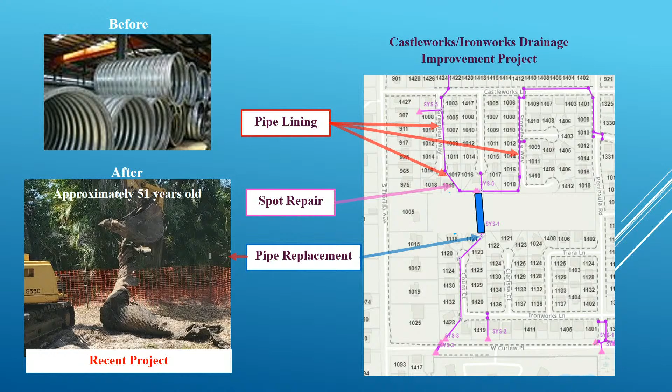I'd like to put in a plug for anyone watching who's envisioning a project in your yard that involves digging: please call 811 and get your utilities located before you dig. Absolutely. I actually have an under drain I have to put in my home this weekend, and I called 811 too. I know there's nothing on that side of my house, but if by odd chance there was something, it's going to cost you a lot of money to be in trouble if you didn't get that located. So what Tommy said was great advice for residents, contractors, everyone.

So the person who did that fence unknowingly hit the pipe - did they have to do anything corrective? Well, we're nice guys. All they did was let us into their backyard, and we fixed it.

And the pipe that you did the spot repair on and then lined - that liner, that's not a structural liner though, right? It is, yes. And that'll take the kind of weight that... Correct. I don't know what the downward force is, but what we did was put another piece of corrugated material on top of it, larger than the hole we made, so any downward force would be absorbed by that. And the structural integrity of the liner is incredible, so we were okay with that.

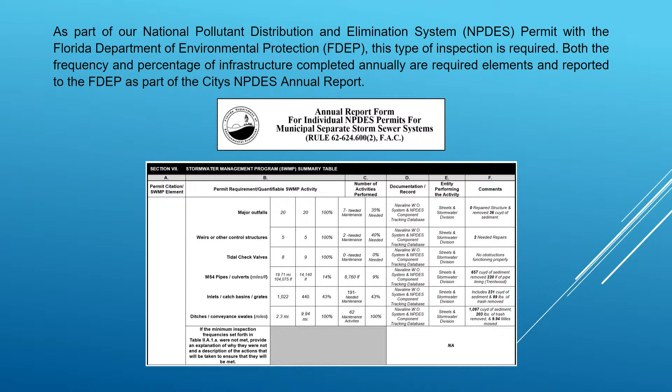Something we kind of live and die by is our NPDES Municipal Separate Storm Sewer System permit, the MS4 permit, through the Department of Environmental Protection. That sets rules and guidelines for items, both maintenance and design and plans review, that are mandatory. It must be done, or they could issue a consent order on the city, with fines - we get in big trouble. So each year I must complete an annual report.

I don't know if you can see it, but that right there is the MS4 pipes. We actually track how many linear feet of pipe we televise, how many linear feet we clean, how much dirt we pull out of pipes, how much nitrogen and phosphorus is in what we pull out of the pipes. It's very comprehensive.

I'm getting used to it, I guess I'm kind of numb to it. That's from the fertilizer, the nitrogen - well, it's naturally occurring, but that's probably the main contributor. But now they're finding even groundwater coming from the ground is a source of nitrogen and phosphorus. How do we remove that? So as great as this program is, sometimes they go a little extreme, and that's why we communicate with our municipality - we say this is not reasonable. They don't give a lot of leeway, but they give us a little bit sometimes.

So I put together this annual report, and it's chock full of data from soup to nuts, everything we do. We have been in compliance since I've gotten here - I've never had an issue, except for a typo we had last year that I had to change. But yeah, that's our controlling force.

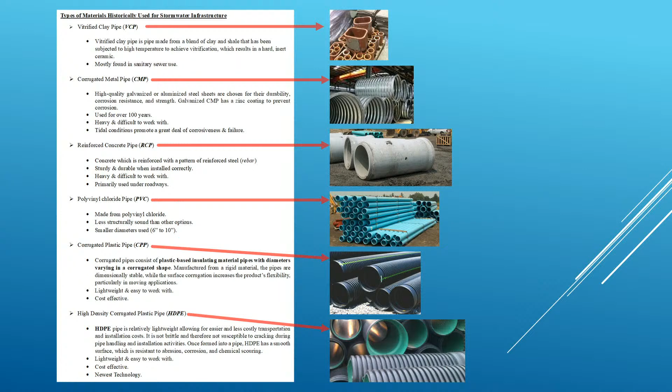So that's what the manufacturers say: well, this is a new idea, let's charge more money and paint it gray. That's great. So this is what we were talking about.

The characteristics, if you look on the left, I don't want to go over all this, you could look at this at home unless you have a question. But corrosion resistance, the material it's made of, the durability in years, and that's projected, by the way. A contractor could put a pipe in today, and in two weeks it could have a road failure because they missed that bunghole or didn't connect the pipes properly. You can inspect it all you want, but if it's off by a quarter inch or half inch, two weeks after a brand new system goes in, not very likely, but it could happen.

Flexibility, not a lot of flexibility with concrete. It's tough to move around. You can't bend it.

Thermal, UV, they all have UV resistance now. I don't know how much that helps four feet underground, but it's a thing. I think what they're concerned with is if it sits out in your yard for any amount of time, the sun doesn't degrade it.

Chemical resistance and cost. The type of material we use largely depends on where it is and what the application is. Just recently, the city accepted in our standard details that HDPE, that plastic corrugated pipe, is acceptable now under roadways. Until a few years ago, it was only concrete. So that's a good thing.

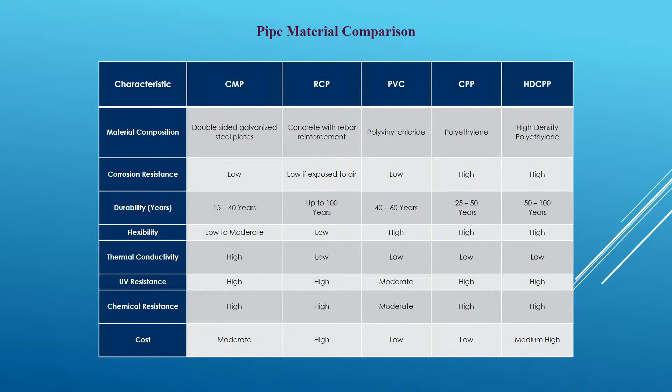So, what's the percentage of laying new pipe as opposed to lining the pipe? It's unpredictable. If the pipes put in here in 1975 were all good, the answer to both of those would be zero. Since we can't predict when it fails, I can't give you an assurance, but 10 to 13% of pipe is repaired or fails.

In the last, let's say, 5 years, have you done more putting liners in or replacing pipe? We've been repairing and replacing, and I'll tell you why. Most of it, 90 to 95%, has been in-house with my guys, my 4 guys.

We didn't have the money. Four people for the whole city? Yes, ma'am, and one's on a street sweeper all day, so I've got 3. Actually, I finally have 3 because I hired someone today. He started today. Finally, I've got a full staff of 4.

Sorry, where were we going with that? Last year, not to throw anybody under the bus, but we've been requesting for years in our budget for an annual stipend for lining. We got one last year, our first, and we used every penny of it. We got it in for this year, and it looks like moving forward we're going to have those funds. It wasn't earth-shattering, $150,000.

We did the whole Castleworks community, and I think we did another location with that. It all depends on how deep the pipe is, how big the pipe is, a lot of factors.

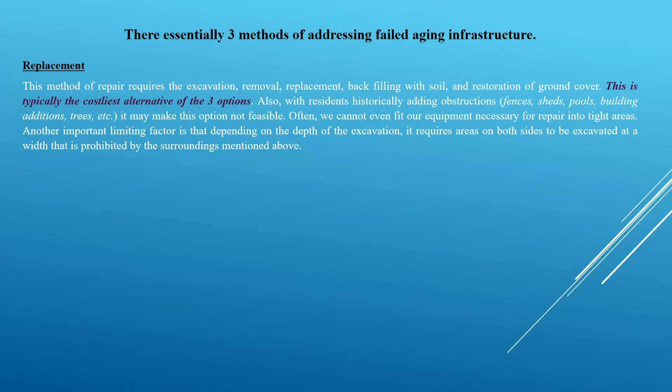This is typically the costliest. We could do one or two sections of pipe in town depending where they are, but for large projects we need a contractor. So then you've got engineering design costs, construction costs of their labor, materials, machinery. We don't have that cost when we do it in-house, we just have the cost of material. It's a day-to-day business for labor and equipment. So that's typically the costliest.

If I may go back, I also run the street department. We'll go out and do potholes daily or every other day. Now if there's an entire block that needs to be resurfaced, we don't have the equipment to do that efficiently or the manpower, so that has to be contracted out as well. Those spot repairs are done by us; the large whole one or two blocks or neighborhoods have to be contracted.

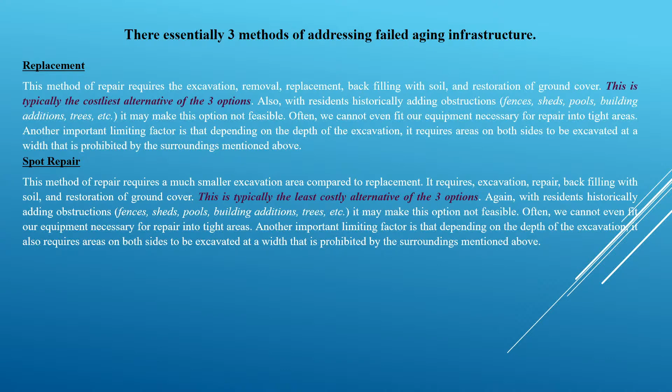So then the spot repair, which I mentioned, where we get into where we have to go - if possible, we dig down to the pipe and expose it. We see if we have to use hydraulic cement, another piece of pipe, or we always use our filter fabric to keep dirt from getting back in, and then we backfill. Those spot repairs are single spots. Now there may be three spot repairs on a run of pipe, but they're still considered spot repairs.

And then finally the rehab or rehabilitation, which is the slip lining or what they call CIPP, cured-in-place pipe. It's really interesting, there's new ways they're doing it now, but they essentially go in one manhole and pull like a limp hose through. They tie it off on one end, and on the other end they open it up and inject super hot, I think 240-degree water. So it fills up this limp straw-like material so it expands to the pipe. Over time that heat cures it and it turns into fiberglass - you can't even beat it with a hammer. Then they unplug it, let it cool down, cut the ends off, and now you have a new pipe.

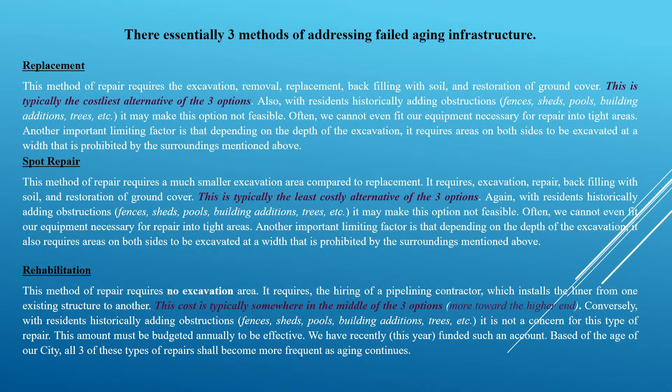Whoa, that's cool - is it a resin? It's not quite that, it's in the material of the fabric of this lining. So what the hot water does is push it out, expand it, and the heat activates whatever's in the fibers. It's like a fiberglass sleeve that activates within it. There's no chemicals added, so it's absolutely safe for stormwater applications because it's within the material that the pipe's made out of, or the liner's made out of.

Pretty cool, you guys asked great questions. I thought I was gonna be out of here in five minutes - I'm like, man, I hope they ask me some questions. No way, thank you, this is great.

Probably level of service - you may or may not have heard about that. We're going to talk a little bit about that here in a minute, but things involved when it comes down to what you have to do. There's a level of service we want to provide to business owners and residents, basically quality of life. You've got permitting, whether it's building department, TRC, city permitting, Southwest Florida Water Management District permitting, Department of Environmental Protection permitting, Army Corps of Engineers permitting. It all depends where, if you're by a water body or what the thing is. So permitting is a big thing.

Feasibility - can we fit through those two houses with a machine to dig it? No. If we dig this pipe, is this lady's bedroom going to collapse into the hole? So we got to look at feasibility of what type of repair, and then just like anything else, the cost of replacement or the cost of doing whatever you have to do. Sometimes it's like get in there and fix it the best you can, buy us a few months till the new budget comes out. So it's a juggling game.

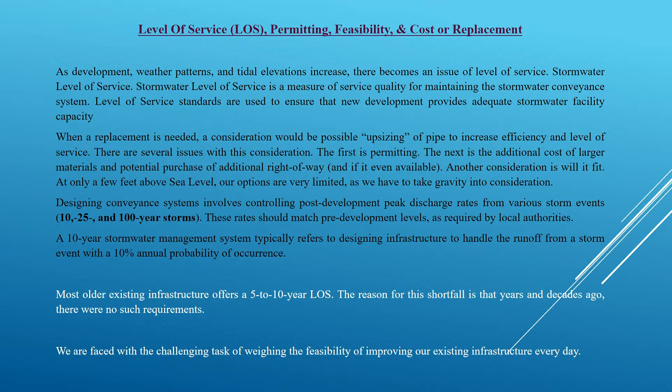Everything could be fine, but when you get that first 100-year rainstorm and you flood, it won't happen very often, or it happens a few times a year. If you have that bigger, huge pipe, it's still going to happen probably, but then again our storms have been increasing in frequency and intensity. So this whole 5, 10, 25, 100-year storm classification doesn't happen once every 100 years anymore, it seems like it happens 8 times a year here. I think they need to rethink that methodology.

One other consideration is the Water Management District has rules about stormwater, and people like the water to be off their property as rapidly as possible. But there are rules to protect downstream folks, so you have to maintain standards showing you're not putting much more flow into downstream rivers with much higher peak flows, because that might cause downstream flooding. A lot of how this is handled is through storage, having stormwater ponds and things like that. Everyone gets focused on the pipes, but it's about storage, having a place for that water to go and slowly bleed it off over time so you're not inundating all the people downstream. Because if everyone got rid of the water as rapidly as possible, you'd have a huge amount of flow going through, flooding everyone for a very short duration, which wouldn't be ideal.

Years ago, the main thing was flooding, let's keep these residents from flooding, so they put the water somewhere else. Well, now it's water quality they're focusing on, right? Think about this, we have an existing system that we can only replace in kind, we can't make it bigger. I got a sneak peek at our new permit, they're including in all projects for us to implement a water quality element, maybe a pond where the water sits and the nutrients settle out before it discharges.

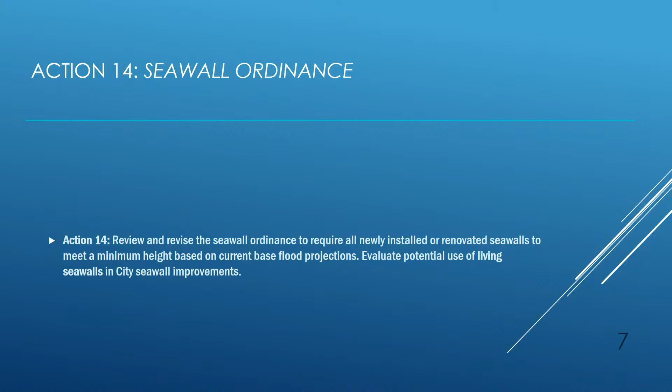Action 14, seawall ordinance. I'm sorry the text is so small, it wasn't like this when I originally made it. I don't really know what happened in our technological transfer, but Action 14 stated: review and revise the seawall ordinance to require all newly installed or renovated seawalls to meet a minimum height based on current base flood projections, and evaluate potential use of living seawalls in city seawall improvements. The implementation timeframe is 2024 to 2027.

The comprehensive plan also addresses this in the coastal management element. Objective 1.2 says maintain, restore, and enhance shorelines to reduce risk to property while maximizing benefits to natural coastal habitat, resources, and systems. Additionally, similar to the stream buffers and wetlands, land development code revisions could be done in accordance with the policies established in the comprehensive plan.

So it could require land use code changes going forward. In addition to land use code changes, we have found a model ordinance through the Tampa Bay Regional Planning Council that has been vetted and adapted from other cities and coastal areas in Florida. So that would be a great jumping off point when it's time to actually dig in and talk about how those policy changes are going to take place.

Okay, Actions 16 and 18 I put together because we have merged them a little bit: the climate action plan and the greenhouse gas reduction target.

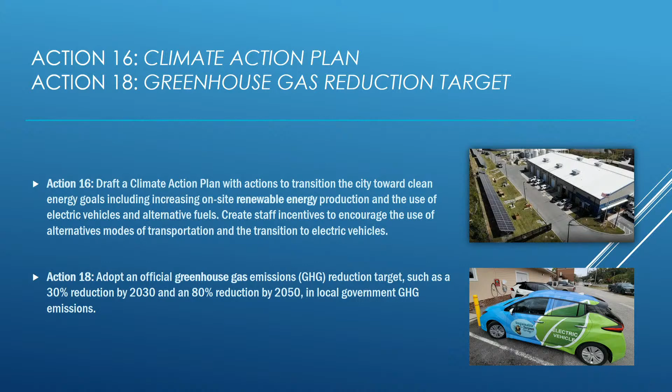So where do we stand on this? We are currently working on the climate action plan, so within the implementation timeframe we will have this completed. The work was initiated back in June.

We have our consultant ICLEI using the baseline 2019 data to project future emissions by category within the city. So some modeling is underway to assess the value of actions the city could take to reduce our energy consumption within specific areas of use.

Part of the climate action plan is going to be the specific target, and the goal of that plan is to create a target that is achievable — strategies that the city can actually use to capitalize on the best use of the resources that we have. As Tony was talking about, there are always going to be limitations within what a city the size of Tarpon Springs can do, so we want to make sure that it is achievable.

We are participating in the development of the regional comprehensive climate action plan. I actually attended a meeting this morning specifically about setting regional near-term as well as long-term targets within a lot of the sectors.

Specifically, they were talking about water and wastewater, transportation, land use, energy, and solid waste. So at the same time that we are doing ours, there are obviously regional efforts talking about the same exact things, and it's really beneficial timing to see that process and to have our consultant who's actually also involved in the regional one as well.

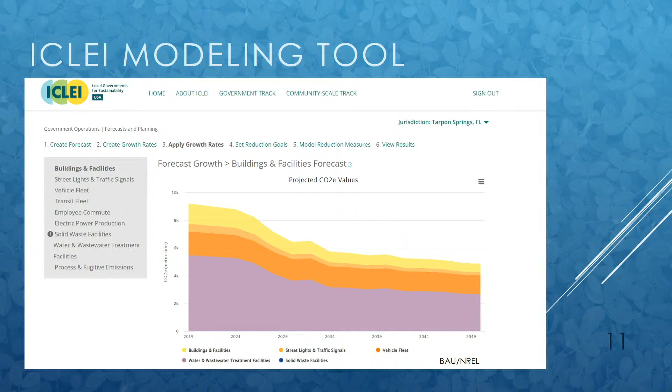So just an example, and Tommy has talked about this before a little bit with the baseline data, but water and wastewater is the biggest user of energy in the city. So we're always looking at ways to make things more efficient, but that's again incremental changes.

All right, and lastly, this is a longer term time frame. So Action 35, evaluate family-friendly workplace policies for local government employees. It states: evaluate family-friendly workplace policies for local government employees, including paid family leave, flexible scheduling, teleworking, job sharing, and easily available childcare. Limit contractual services to equal opportunity employers and ensure that all city employees earn a living wage according to applicable standards. So that is a lot in one action.